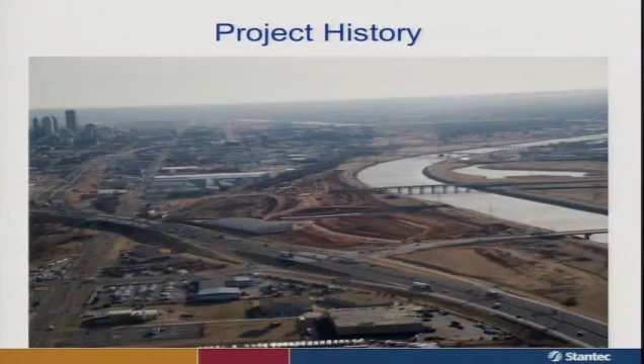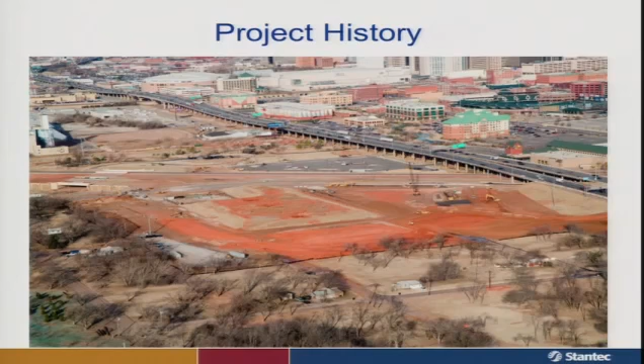These are some of the old photos of the old interstate as we all remember it. Most of that has been demolished now through the Crosstown, with the last pieces being wrapped up now. This is also the east section that has now been demolished through the city's east side, the Bricktown area. We're finally up to the point where ODOT's ready to begin design of the new boulevard, and there's been a lot of progress made in the last year.

Looking at that project history, in '96 there were citizen advisory committees. In '97 and '98, there was research and studies. In December of '98, Alternative D was selected, and that's the location of the current Interstate 40. In 2002, the record of decision, and in June of 2002, land acquisition was underway. In 2005, the groundbreaking ceremony for the new Interstate 40. Just this past February, Interstate 40 opened, and today in August of '12 we had the first public meeting, and now we're finally to the second meeting.

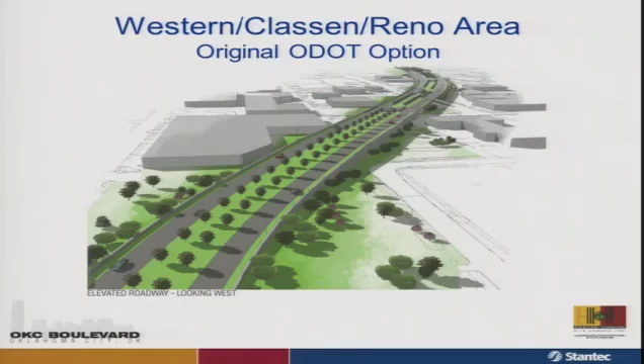This was one of those original slides we showed at the late August meeting, and I think this was the area that caused most concern. What was originally proposed was a bridge spanning Western, Classen, and Reno Boulevard. I put up a slide at that time about the record of decision, which called for a lot of the existing interstate to be rehabilitated through this section. But concerns we heard from you and from business owners were that this might not enhance development in the area, that it wasn't walkable, that it wasn't friendly.

Obviously, it had traffic in mind when it was talking about having an access into and out of downtown. That is one of the goals. We do have to provide some new accesses in and out of downtown. There's a lot of challenges occurring right now along Western Avenue. Those commuting into downtown are seeing tremendous backup on I-40. Those trying to leave downtown, specifically after game events, are having a hard time getting back on the interstate through the Western corridor.

The boulevard is absolutely necessary to provide that traffic in and out of downtown. We also have other goals with the boulevard, to make sure it provides a means to showcase our city, to showcase our downtown. But there are alternatives to this design, and that's where we begin tonight.

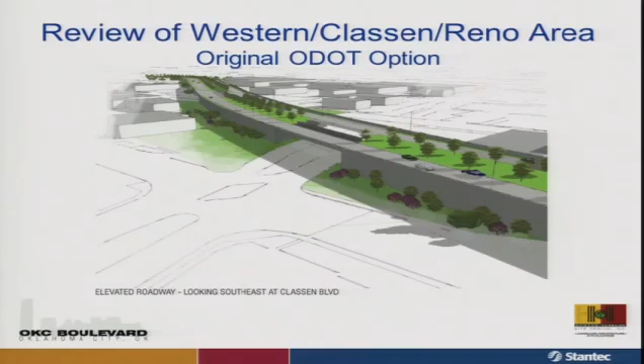This is another one of the renderings that was shown, talking about some of the vertical walls that were being proposed, trying to encourage development. But obviously this first pass was not acceptable.

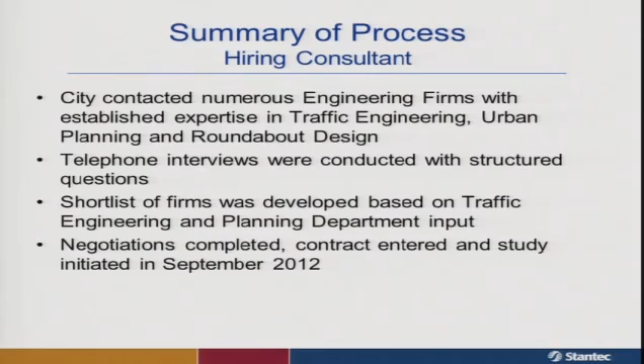Following the meeting, we sought City Council support and gained that in hiring a consultant. So tonight, we contacted a number of engineering firms. We had telephone interviews to expedite the process. We shortlisted firms, but we weren't looking for a firm that was just a traffic engineer. We were looking for one that was also a developer, one that was also a planner, and we found that.

Tonight—there are a lot of goals in Oklahoma City, especially for our downtown connections, and one of the things is growth. We want to promote downtown development. We want to promote the future of Oklahoma City. Negotiations were completed in September of 2012, and we engaged Stantec.

Stantec is a firm that was founded in 1954. It's a nationally recognized firm in the transportation industry. They're also experts in roundabouts, and we talked about roundabouts at length at our last meeting and what were the opportunities for a roundabout on the boulevard. They've actually designed over 100 roundabout projects across the nation, but they've also been able to provide us with a lot of opportunities to look at other crucial areas of downtown and Western Avenue.

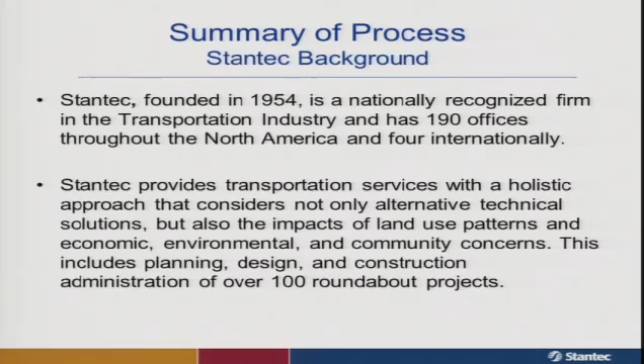Thank you and good evening. Let me start by saying it's really been an honor for us to be working with you on this project. It's definitely been a project you've been involved with for a long time, and it has the potential to really transform this portion of the community.

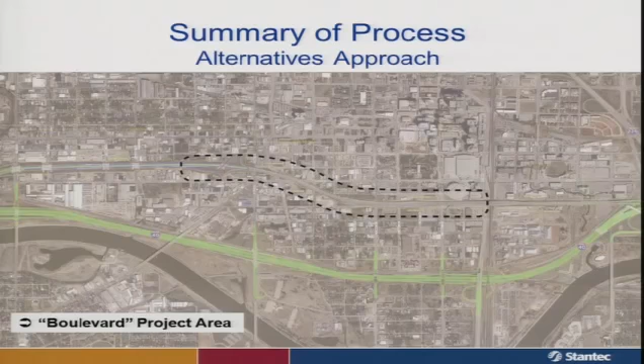If you step back and think about this from a land planning, community planning standpoint, you're taking an area that once was a limited access freeway where land use backed up to the freeway, and looking at the possibility of repurposing that roadway to something else. It's important to remember that it still has to work with the roadways around it, and it still needs to support the businesses and neighborhoods that are out there.

So when we were given this assignment, we looked at the fact that the corridor was there. It's an east-west corridor, used to be a freeway corridor, and now the freeway corridor has been moved to the south. But one of the key things about land use planning and community planning is that the roadways, the transportation system, and the land use system are intrinsically linked.

So as we started to put together our analysis, we took what's called the functional classification system—I'm not going to give you a lot of jargon, but that's just a fancy way of saying what's the roadway network that serves this part of the city. Roadways are divided up in a hierarchy, from limited access freeways all the way down to the local street that provides access to individual properties. Each one has design standards, whether it emphasizes mobility, like a limited access freeway, or emphasizes access.

So this is the main thoroughfares, the major arterials that relate to the boulevard corridor. And we then looked at the minor arterials, again, because you didn't have individual property access on the freeway.

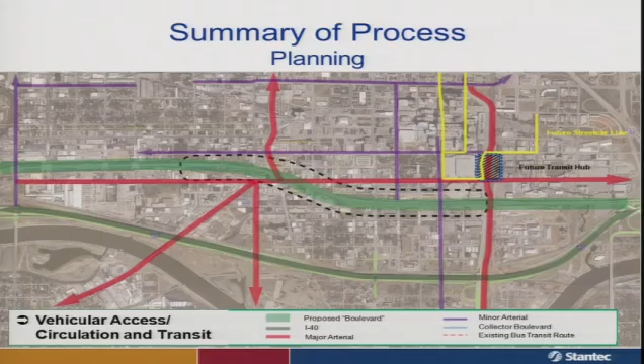The businesses in that corridor are dependent upon a strong paralleling set of collector streets to provide their access. And so we then looked at the rest of the transportation system and the future transit hub in close proximity to the downtown portion.

One of the things I want to highlight here is that if you simplify this, and look at the graphic that Mr. Wanger showed just a few minutes ago, the original design had a limited access freeway that was elevated, and all of these movements were able to function without a lot of conflict because they were grade separated.

So if you take away the grade separation, and I know that's an objective for a number of people in this room, you still have to find ways in which this corridor relates to all of those movements.

And if you look at it simply like this diagram does, there's really four major east-west roadways that roughly parallel each other through this area. The boulevard corridor itself is an east-west corridor, but it actually crosses Reno, and so there's a point of conflict there.

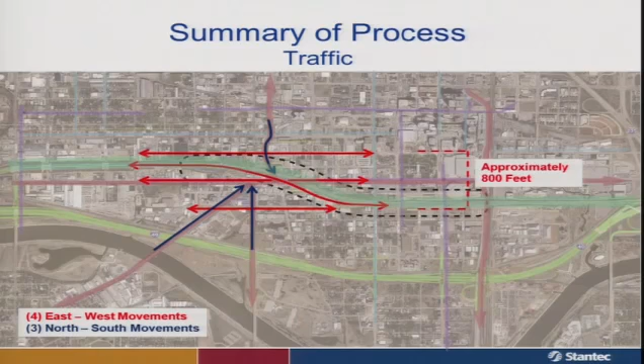But if you look at the converging roadways with Exchange and Klein and so forth, there's a lot of movements that need to be dealt with one way or another, and that was really some of the key focus points for our work. So within an area of roughly 800 feet, you've got to find a way to resolve all of those issues.

So the process we went through was to identify all of the pertinent land use information that's available, all of the studies that have been done in and around the area. There isn't really a master plan for the downtown or for this portion of the corridor.

I know you've been working hard on Plan OKC, but that isn't done yet. And so we identified all of the land use information we could find.

We put that together, we looked at it, we walked the corridor, we drove the corridor. What I just put up on the overlay there in the purple is surplus right-of-way.

So one of the things that needs to be thought about as this process goes forward is if you're going to have the boulevard function as a lower classification roadway carrying less traffic, smaller lanes if you will, there is some surplus right-of-way out there.

And that surplus right-of-way has the potential to ultimately augment and enhance the businesses that are out there, could support redevelopment of the corridor long term.

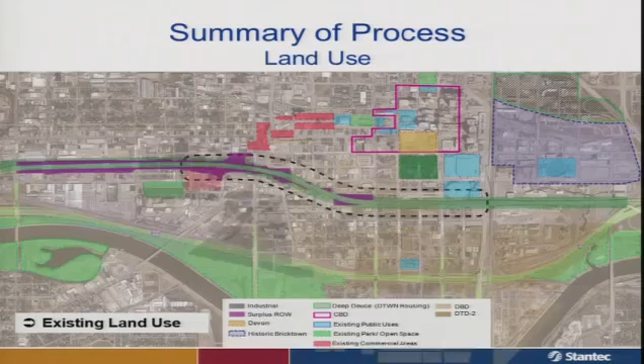We took the existing zoning and overlaid that and looked at it, and then brought into it the Core to Shore plan, which was obviously one of the more ambitious plans that has been done that affects the area.

And one that there's implementation steps that you're going forward with - a very exciting Central Park project that's in the planning stages, the convention center, and so forth.

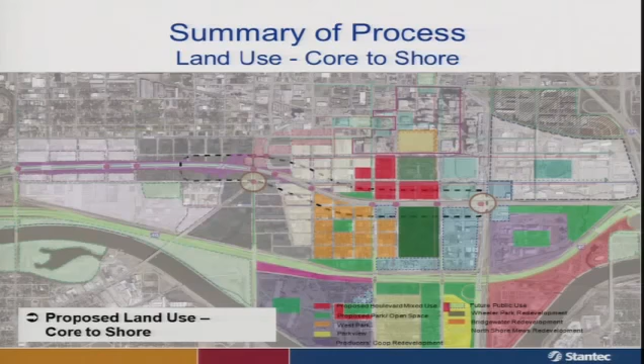And it's important for me to say that we did this as a planning team before we got together with our engineering counterparts. And so as we looked at it as urban planners, we said, really the corridor breaks down into some logical segments.

There's what we call the Boulevard Downtown Zone, and that's the area where I think you're really going to see the most transformation.

It's the area where, as you saw from the slides previously, and you certainly know because you live here, the downtown used to be literally walled off by a huge section of elevated freeway.

And I know that you know, after looking at taking down those large bridges, that the opportunity to see into that area and the visual improvement is dramatic.

Well, if you add to that the future Central Park and the public realm improvements that are currently being designed for the boulevard in this corridor, it really has the potential to transform that area.

We then identified what we call the Boulevard Transition Zone. And this area that we call the Boulevard Confluence Zone is that area where all of those roadway patterns and traffic movements I spoke of previously come together, and then the Boulevard Access Zone.

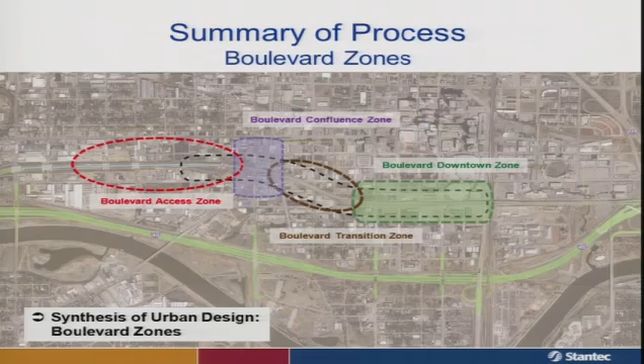We put together a number of specific recommendations for each of those areas. Each one of them has the potential to be improved in a number of ways.

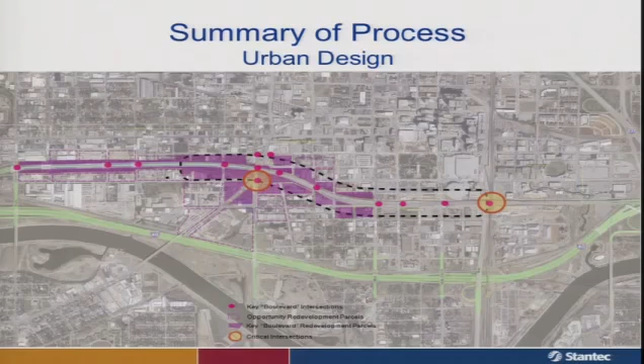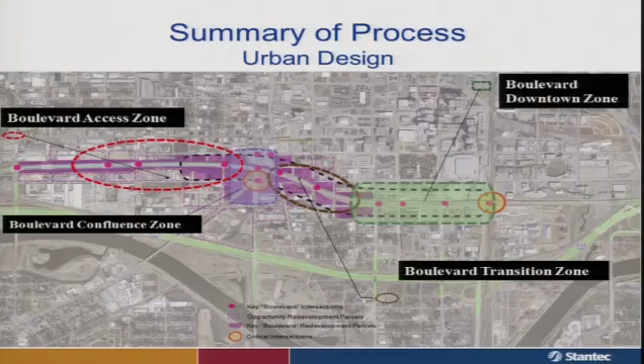Stepping back and identifying where are the key intersections along the boulevard that need to be thought about, and where are there opportunities for urban design improvements to create a sense of arrival into that area. So if we look at that again, we've got the Boulevard Access Zone, the Boulevard Confluence Zone, the Boulevard Transition Zone, and the Boulevard Downtown Zone.

Now, as we thought about those, I mentioned that there isn't a single overarching master plan for the downtown, but there are a number of planning studies that have been done. A streetscape plan was done, and there's a number of plans that have looked at pedestrian enhancements, trails, and bike paths. So we pulled together all of that information and summarized where there are key intersections, key nodes, key gateway viewpoints, overlaid all of the work done on those bicycle and pedestrian studies, and identified on the boulevard where those key places would interface with the boulevard.

From our perspective, one of the areas where you're going to find the most dramatic improvement is the opportunity to extend the tremendous investment that's been happening in the downtown. Just anecdotally, I haven't been to Oklahoma City in about 25 years, and I was really amazed at the renaissance going on here. That doesn't happen by accident - it takes an engaged citizenry and public and private sector leaders. Congratulations for what you've already accomplished, and I know with what's on the books, the next chapters are going to be especially bright.

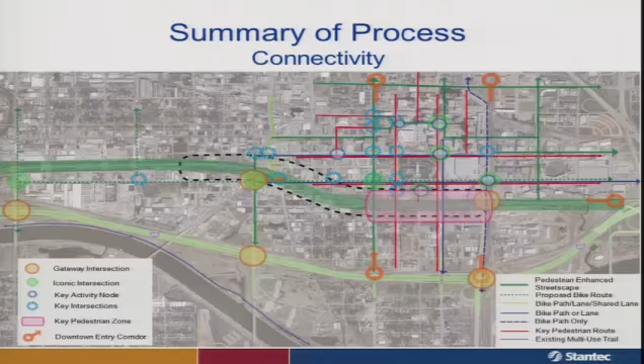So in summary, when we got together with our engineering counterparts, we said, as we look at this project, there's a number of objectives that could be identified. One, it certainly is an opportunity to reinforce the Core to Shore plan recommendations.

Several places along the corridor, in slightly different designs depending upon the circumstances and adjacent land uses, but throughout the Boulevard project, there are opportunities for enhanced pedestrian and bicycle access facilities and crossings. There's a number of businesses along that corridor, light industrial businesses and others. It's important that no one takes away the message that we're suggesting anyone gets pushed out, or that the city should rush to redevelop that area. I think it's going to take several decades for that area to redevelop, but there is surplus right-of-way, and the improvements, the addition of the amenity of the boulevard through the corridor, does present an opportunity for those property owners over time - that surplus right-of-way can be added to that property to put more land back on the tax rolls. So this supports economic development opportunities and economic growth.

I do a lot of work in green infrastructure. This is a corridor that's going to have the introduction of a number of trees, and that enhanced urban tree canopy along the corridor has a very positive effect in terms of air quality and the opportunity to manage stormwater in a natural way.

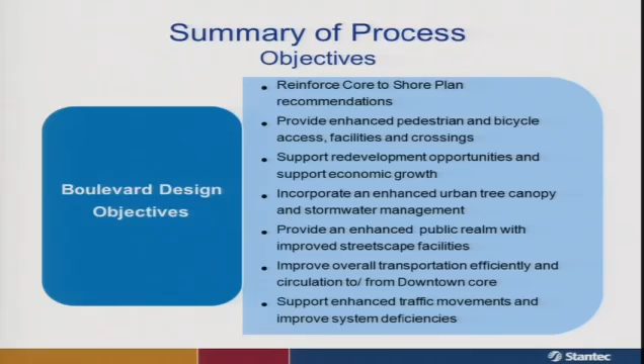So I'm going to turn it over to my colleague, Bill Ferris, who's going to go through the alternatives. And again, as Mr. Wenger said, we're very happy to answer questions at the conclusion. Thank you.

Thank you, John. Maybe I ought to start off with a little bit of evolution. A lot of times folks think that the planners get involved up front, which would be John, and then the traffic engineers come in midway and decide to change everything. I think our relationship, even though John is from Minneapolis and I'm from Phoenix, has been very synergistic, and I think you'll see through the results that we've incorporated numerous planning elements in the development of a functional roadway.

And to kick it off, we want to talk about alternatives. We really had - we were uninhibited by anyone when we started this project. We had a clean slate, a white canvas, if you will. So we went immediately to what was originally proposed.

Number one here is grade separated roadway. That was the old I-40. It's gone now, and we've heard loud and clear we don't want that back. But we also didn't want to shout anyone down saying that's a bad idea. Let's get all the ideas out and then go through a logical process to shorten that list of potential alternatives.

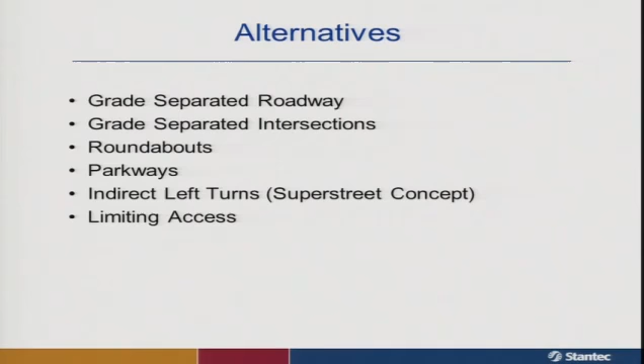We also want to look at parkways, more of a boulevard type scenario. We wanted to introduce a few things you maybe haven't seen locally: indirect left turns, which we call the super street concept, which had its origins in North Carolina. I'll show you photos explaining the indirect left concept. We also looked at limiting access, potentially closing a street for the betterment of the functionality of the boulevard proper, and I'll show you some examples of that as well.

On roundabouts—when I was here a couple months ago, I saw a presentation, I believe at the farmer's market, where a roundabout expert came in and explained a lot of detail on roundabouts. I'm not going to regurgitate that, but I will hit on a few key points.

The benefits of the roundabout, as you can see on the diagram—I'll start with the signalized intersection. All these yellow dots indicate conflict points between vehicles on one street with vehicles crossing on another. The red stars are vehicle-pedestrian conflict points. Just by the clustering, you'll notice there's a lot less happening at the roundabout, a lot less conflict.

What we find is that when an accident does occur in a roundabout, it's usually at a much slower speed, so accidents tend to be less damaging. You'll also notice the roundabout acts as a traffic calming measure because you're not going straight through, you're going on a curve, and generally speeds are lower than at a signalized intersection.

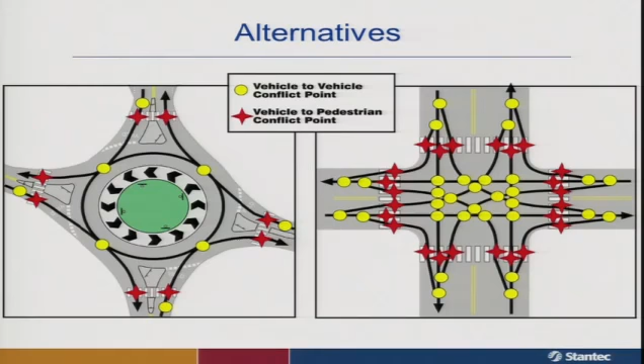Also, geometrically, you'll notice the signal is at a 90-degree angle, while the roundabout works very well when you have a leg coming in at an acute or obtuse angle. It allows us to more properly get traffic through an intersection.

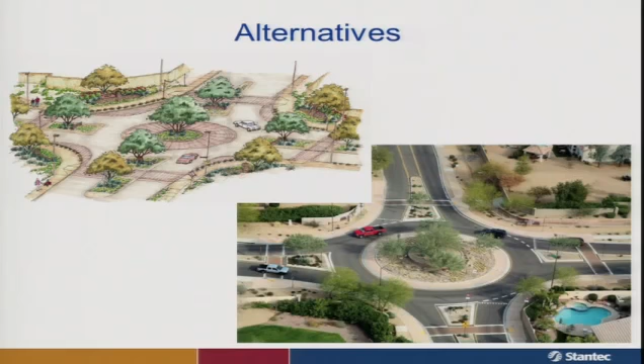As I mentioned, we've designed well over 100 roundabouts. You see a planning level schematic here, and then an actually constructed roundabout. This is just a one-lane roundabout.

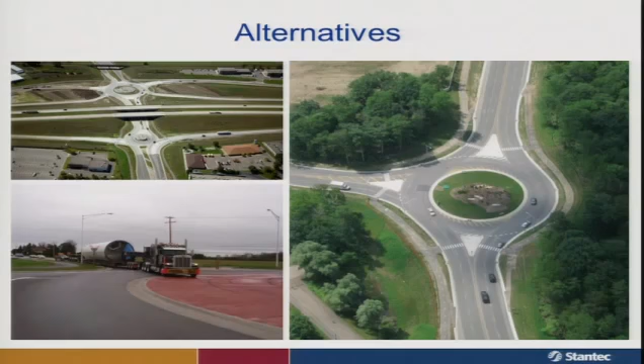We also have unique situations, like a two-lane roundabout with special pedestrian or bicyclist accommodations around the edges, or an instance where you need to build an apron to accommodate oversized vehicles or large volumes of traffic. We also have a freeway here with a multi-leg roundabout on the north side and more of a diamond configuration ramp on the south side. Roundabouts do serve a purpose in many locations and situations.

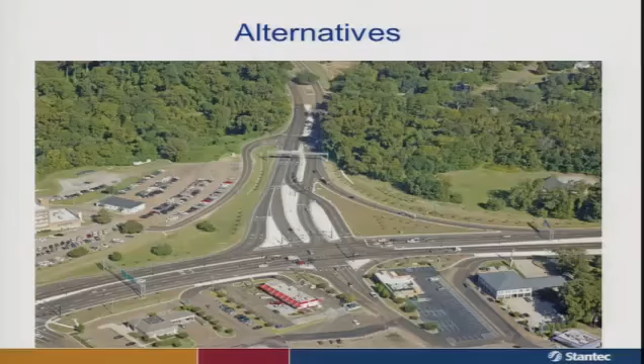The signalized intersections, the number of phases used, the number of greens per direction, the overall functionality of that intersection is greatly enhanced. To take it to an extreme, and I apologize if this is a little bright in the back, but the boulevard would be this roadway, and we have another side street here.

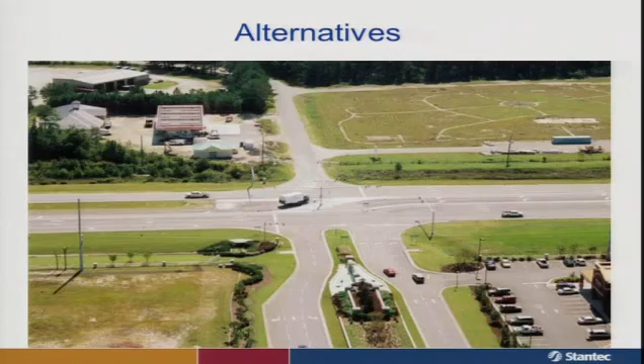In this particular instance, the boulevard, again, you can go left, you can go through, or you can turn right. However, on the side street, we are eliminating a left, we are eliminating a through, and we are forcing all three lanes to turn right. And if you want to end up going through or to the left, you go down and do a U-turn and come back. Again, it's just another option in our toolbox to ensure the functionality of the traffic on your boulevard.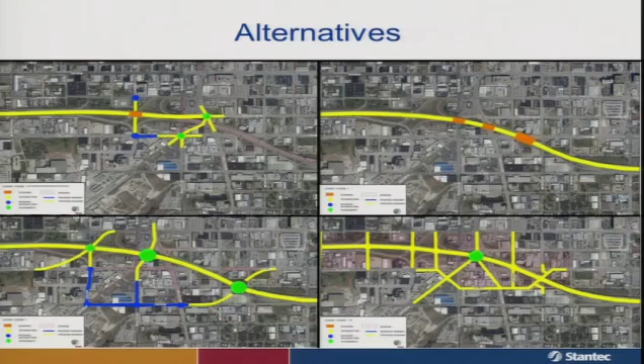A couple more alternatives. We show again a grade separation, a bridge. This one happens to be at Klein. Again, we're kind of maintaining the exchange spine with tandem roundabouts. You'll notice here that the boulevard actually at Classen, do I have this right? Well, you have multiple roundabouts here, and the boulevard does not turn at this point. The boulevard actually extends through.

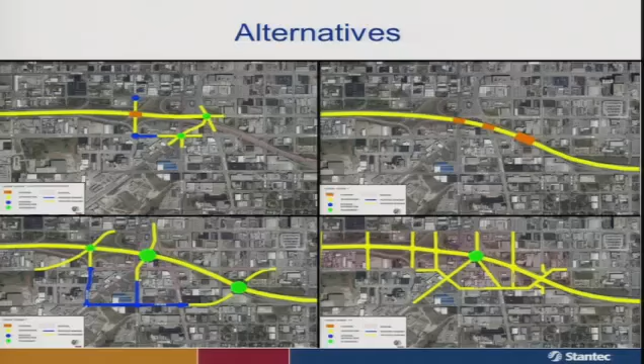Reno extends through. So we really looked at many alternatives, and in fact, at our first debriefing after our first charrette, we got comments back from folks attending from planning and traffic and public works and from ODOT and a few others. We were actually kind of shocked with some of the alternatives that showed up. Can you actually discontinue Reno? Can you actually discontinue the boulevard? We wanted to look at all options.

Then what we did after that brainstorming session is we went back and we said, okay, we need to take 38 or 40 alternatives and start to funnel them down. So we developed some evaluation criteria. We wanted to look at right-of-way impacts. We wanted to look at the functionality of the boulevard and the adjacent roadway network. We wanted to ensure that we were facilitating future development opportunities.

We actually looked at the remaining elevated roadway. So if we were taking what was originally planned as a 1,100-foot elevated structure, but we narrowed that down to just one single bridge over one roadway, how would we evaluate that? And we looked at each alternative in that vein.

We looked at, are the alternatives driver friendly? Are we rerouting folks? As I mentioned, we currently proposed realigning Western with Classen to better capture some of the peak hour movements for commuter traffic. We looked at alternatives that facilitated pedestrian and bicyclist activity. We looked at improving existing network deficiencies. For example, on Sheridan today, the Western and Classen intersections with Sheridan are very close together. We wanted to look at an opportunity to improve that particular area. And then, of course, we wanted to address major event traffic.

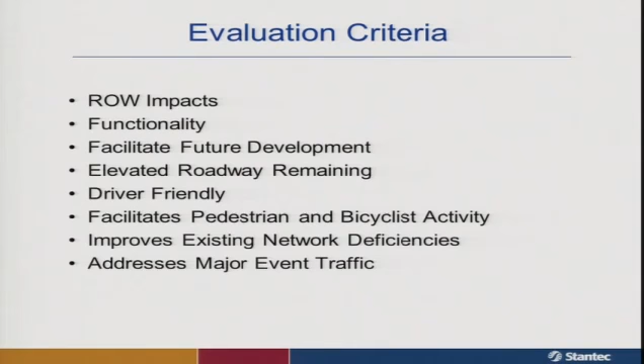Hopefully, come June, you'll have event traffic with the NBA Finals. We want to make sure we're accommodating events just like that.

So what was our next step? We took those 38 concepts, plugged them through the evaluation criteria, and reasonably quickly got down to 7 alternatives. We said, okay, that's a step in the right direction. Let's see if we can narrow it a little further.

And I kind of let the cat out of the bag. A couple of things we did want to discuss: Reno must remain as a through movement, the Boulevard must remain as a through movement, and Western has to be maintained as a connector to the new I-40. I believe originally there were 6 exits from I-40 into the downtown area. After the relocations, we're now down to 2, so it's imperative to retain Western as one of those connectors.

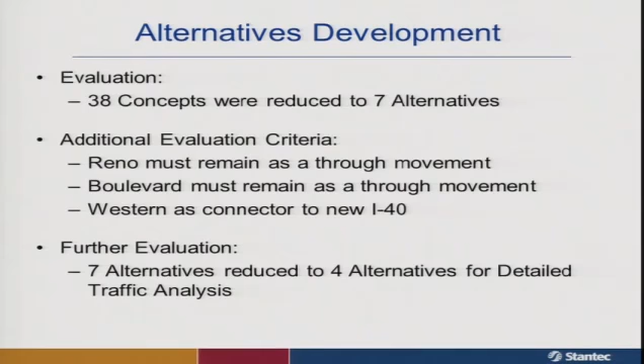So we went through a further evaluation implementing those criteria, and we quickly got down to 4 alternatives for detailed traffic analysis. We've made our pretty pictures, looked at all the development opportunities, and then said, okay, we need to double check to make sure these alternatives work before we present them to you.

So we did a detailed traffic analysis. Through working with the city's traffic department, we went out and literally took turning movement counts during the peak hour, the heaviest traveled hour in the morning and evening, and these are the intersections where we collected that data. You may have even seen someone out with an orange vest and a traffic counter, literally counting every car that went left, through, or right at each of these intersections on each leg of each intersection.

Then what we did is we took that current traffic, which is 2012, and grew it out to the year 2030. We used a 1% growth factor. In a lot of areas across the country, that growth factor is much larger. Now, I know that from a geographic standpoint, Oklahoma City may be the largest city in the country.

From a traffic volume standpoint, in the downtown area, what we wanted to look at is how much growth or how much build-out yet remains within this project corridor. What we felt was there is a fair amount of build-out in this vicinity, and so a 3, 4, or 5% growth rate did not make sense. But we need to account for some growth as we look out toward the future.

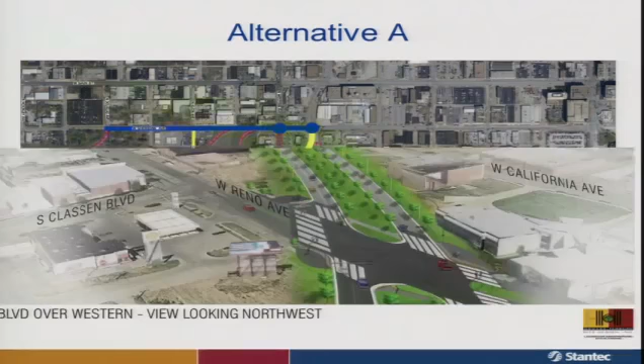ODOT was kind enough to do a couple of renderings of this alternative. Just to orient you here, this is the Reno Boulevard intersection. So this is Reno, and this is the Boulevard. You'll notice here, we start to climb on the Boulevard up and over Western.

You can see Western will travel through this area here, and then will be realigned over to Classen. You'll notice this section in here is a retaining wall, and the difference in height is between 20 and 25 feet between the two roadways.

Here's another angle of the same alternative. Here we are at the west, looking downtown. Again, you see this retaining wall as we rise up over the top of Western, and then we start to come back down as we head toward Reno.

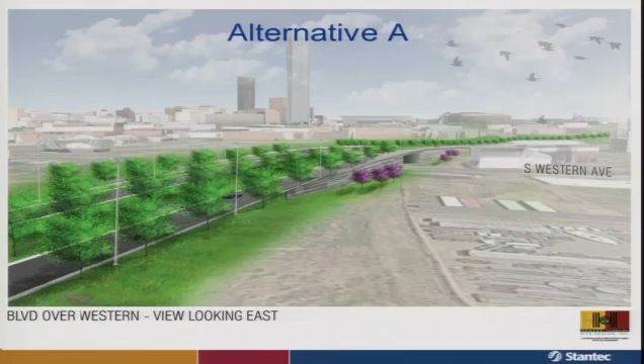We've seen the traffic simulation model, so I'll go on to Alternative B.

Alternative B is 99% the same as Alternative A, the lone differentiator: at this location here, instead of the Boulevard going over top of Western, we're going to take Western over top of the Boulevard. That is the only difference in this alternative.

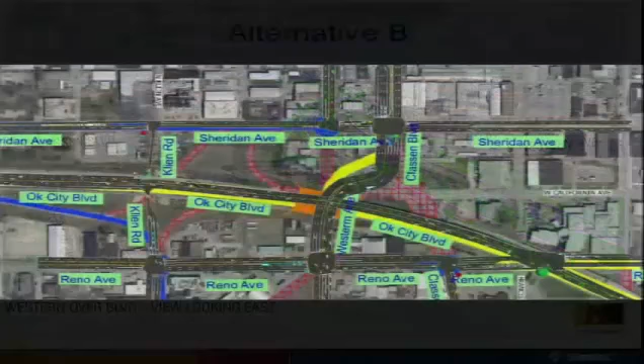What does that mean from an access standpoint? Can we go back... thank you. From an access standpoint, if you are at the Horn Trader, you will not have direct access to Western. You'll have to access from Reno because there will be a retaining wall 2 or 3 feet high at this particular location. Now, the designs have not been completed, but just ballpark, that's what we're looking at there.

We think that because of the long retaining walls, it'll have some impact to the developable land there, some minor impact. Those are the differentiators between Alternative A and B, and let's go ahead and show the simulation. Again, the simulation actually is not going to look any different because this is still separated one level. It's just that Western is now going over top of the Boulevard.

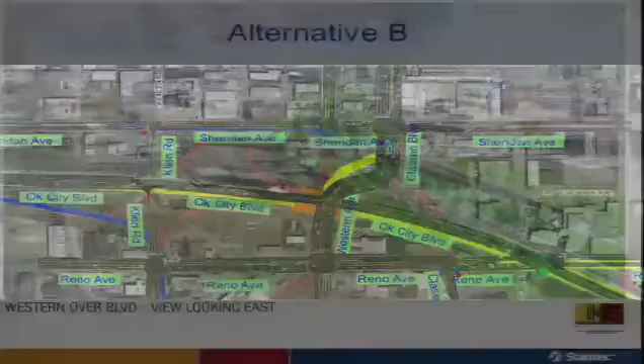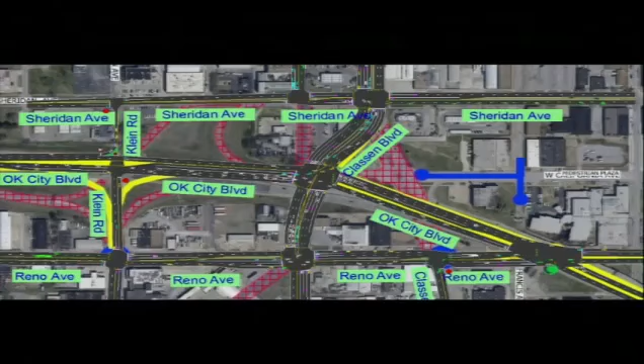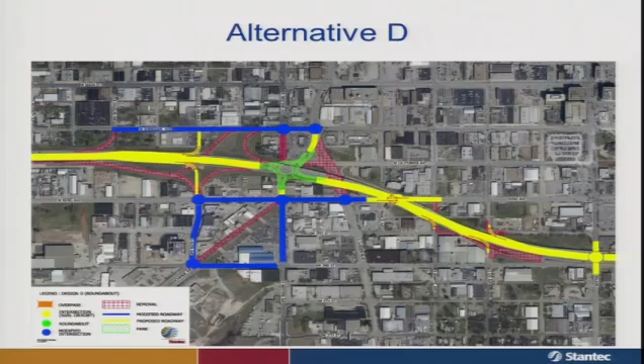Let's go to Alternative D, because this one has the roundabout alternative. You can see that each of these last four alternatives, A, B, C, and D, has really been a compilation of the best component elements of the original 38 alternatives. It's been spliced together to ensure we have the best solution in the Klein area, the Reno area, and the Walker area. The focus here, the difference, is what's happening in the roundabout area.

Here's a roundabout at the boulevard. So the boulevard is here, Western here, and Classen here. You can see we've eliminated this section of Western, eliminated some of the old ODOT ramps, and eliminated Classen's connection here as we've realigned Western to Classen.

What you notice is this roundabout takes up a massive footprint. Not that there's anything wrong with that, but we've also added a third lane to the roundabout, which will cause challenges since one of our criteria was being driver friendly. It's a bit of a challenge for those who watched, I think it's European Vacation, where Clark gets in the middle and can't get out because of the additional lanes on either side.

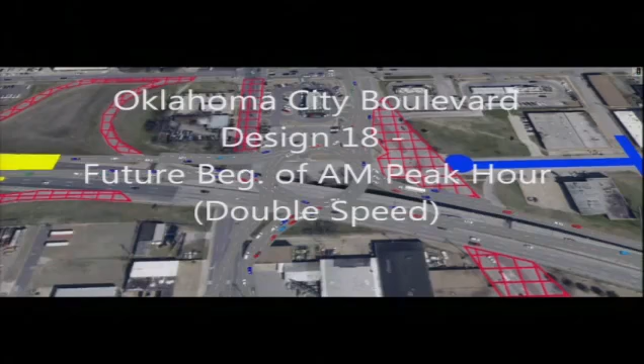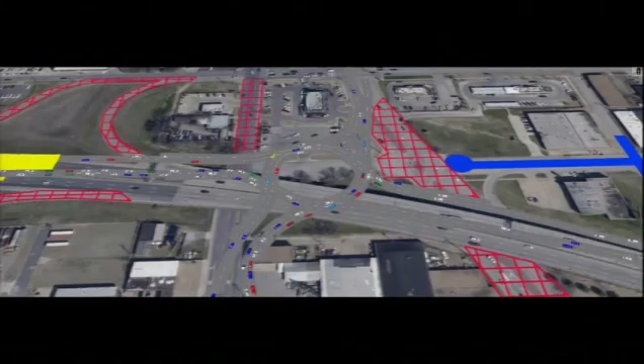Now, if this was built today, would it work? It probably would, especially if we designed it with 3 lanes. But as we get out into the future, 5, 10, 15 years out, this won't work. It would have to be removed and replaced with a traffic signal or a grade-separated type intersection.

Let's head back to the presentation.

So our recommendation is Alternative A, which was the grade separation of the new boulevard going over Western. It's the realignment of Western with Classen. We provide some minor access at Klein. We eliminate segments of Exchange, Classen, and Western.

Part of the theory behind this is we feel Alternative A provides superior development opportunities and less retaining wall along the boulevard frontage. We believe it provides superior pedestrian walkability, especially given the grade separation of Western with the boulevard. Under Alternative C, with an intersection at ground level, you had 7, 8, 9, 10 lanes of traffic. If you were a pedestrian, you'd push that button to cross the boulevard and have to go over 100 feet while that little white man is telling you you can cross.

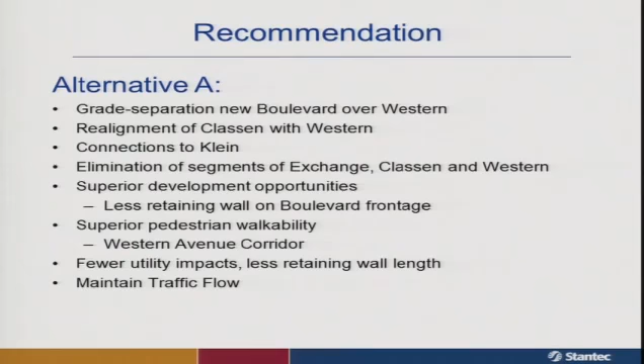It's a challenge. Under the recommended Alternative A, you're going to have uninhibited access across, actually under the boulevard, so you will not have to cross all that traffic. There are fewer utility impacts, less retaining wall length, and the ability to maintain traffic flow well out into the future. This again is showing Alternative A.

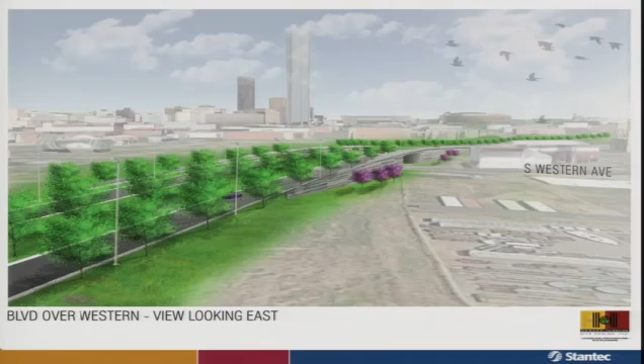Again, Western going underneath the boulevard.

In conclusion, Alternative A provides integration into the surrounding transportation network and will improve on some existing deficiencies. Fundamentally, we have the opportunity to change the image and character of the corridor and provide a greatly enhanced arrival experience into the city.

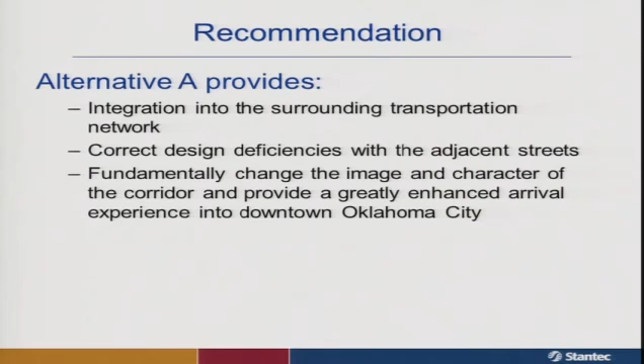We support and serve the existing corridor businesses while leveraging surplus right-of-way to support long-term redevelopment opportunities. Taking from John's presentation, the ODOT right-of-way for when I-40 existed previously was significantly larger than the right-of-way required for the new boulevard. We want to take that surplus right-of-way to accomplish dual objectives of greening the corridor and improving the image of the area, and also to complement and enhance the downtown core.

With that, we'll be available for questions afterwards, but I'd like to turn it over to Eric to follow up with some other outcomes.

Thank you. I think when we started the initial presentation, one of our original goals from our last public meeting was to come with recommendations on some alternatives to the long-span bridge that was such a concern at the last meeting. I hope tonight that with Stantec's assistance, and the opportunity to look at some of the other design alternatives that weren't necessarily part of the presentation, you've gotten an idea that there were a lot of considerations taken to at least build a better boulevard.

When we look at the different options, we had some additional outcomes that would also enhance downtown and west downtown. One of the things you saw in the alternatives was the Western/Classen traffic improvements, where we can actually mitigate some of the existing challenges with the intersections that are too close there on Sheridan Avenue.

One of the other things we looked at was increased accessibility. Those started out at Klein and the Boulevard. You saw some additional opportunities to get out of the boulevard onto some of the city grid. We also have some additional opportunities east of Western that would occur at Chartel and Lee, and those are some things we'd like to further study as well.

When we came to you last time, I think one of the first conversations we had was at the first intersection at Walker Avenue if you were eastbound into downtown, and we've provided, through some analysis with Stantec, a lot of additional opportunities to access the development areas to the west.

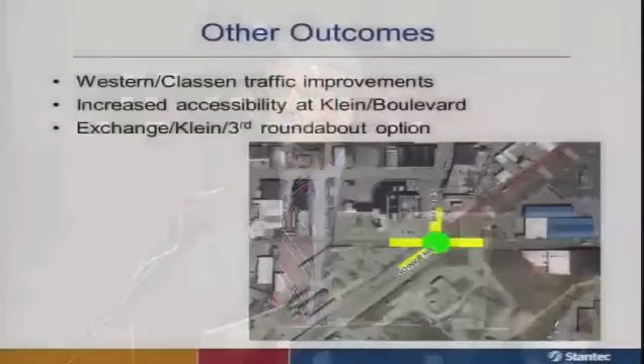Roundabouts do have an opportunity in Oklahoma City, and as we visited further with planning and looked for additional opportunities, although this may not be something we would build as part of the Boulevard project, if you look at the area of Exchange and 3rd Street, there's a little excerpt here on the screen. We think there's a tremendous opportunity for redevelopment in this area with a future roundabout at this location. This is something we've already experienced in Oklahoma City on North Downtown.

This would be at 10th and Walker. A lot of us are now familiar with the Plaza Court area there by Kaiser's and St. Anthony Hospital. We've been very successful with some single-lane roundabouts and encouraging development there. This would be something that could help respond to the area and seek additional development opportunities, and something we might plan as a future city project, but definitely real possibilities for downtown.

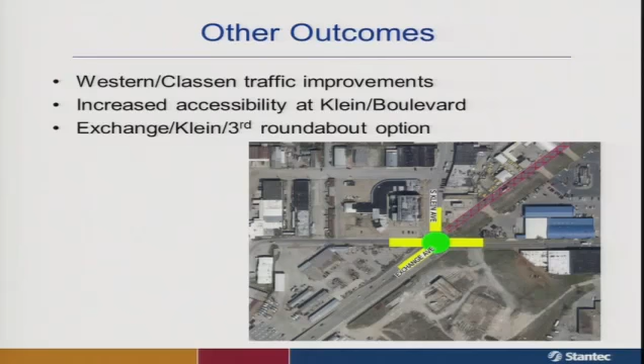So as we get ready to go into the question and answer session, to summarize a few things: some of our goals were to ensure traffic and transportation, but we also wanted to make sure planning, future development, and pedestrian friendliness were keys as part of the solutions. We also wanted to enhance access to Interstate 40. Obviously we're having significant challenges with the Western Avenue connections, both in the morning and afternoon, and also after game traffic currently with the Thunder. As downtown continues to develop, we're going to still see tremendous access needs, so building the boulevard is absolutely necessary to provide those additional enhancements to downtown.

I also wanted to thank our partners at ODOT. As we come to you together tonight, I'd like to introduce David Streb. His staff has been instrumental tonight in making the facilities available. I think as you saw us at the first meeting, we really are partners.

ODOT wants to make sure they deliver to Oklahoma City a street that we can be proud of, one that has the city's input, and your input tonight as we get ready for questions and answers is vital to make sure we deliver what you want. I'd like to invite David up to make some closing comments from ODOT's perspective and introduce some of his key staff.

Thank you, Eric. I want to jump on what Eric had to say about the partnership, because we've all been working on this project for a very long time. I think what's being looked at is going to be a beautiful future for the downtown core for Oklahoma City. I want to introduce a couple of the key folks here, and encourage you all, if you're not comfortable in this setting, ODOT is also available to answer questions one-on-one.

Casey Shell, our Director of Operations, is back there. Paul Green, our Division 4 engineer, has been very involved. Tim Tegler, our Head of Roadway Design. Bob Rusch, our bridge engineer. Dawn Sullivan, our Environmental Programs Division. Terry Angier, Media and Public Relations, is also here, as well as John Bowman, Planning and Research. I think John's been here since the birth of the project.